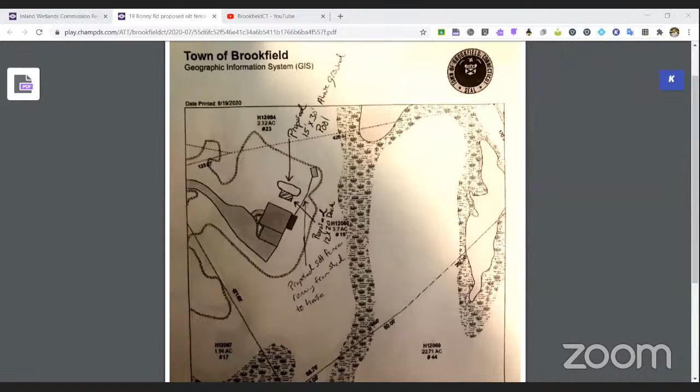Yeah, I'd like to look at that a little better. Again, that's part of the difficulty of these Zoom meetings, but we got to get it right. We have one chance to get it right. All right, I'll send that over for Monday. Okay. Or tomorrow. All right, good. Our next regular meeting is August the 10th, right? Yeah, August the 10th. Well, that's good. Now that I know it's staked, that also gives me a chance to get out there.

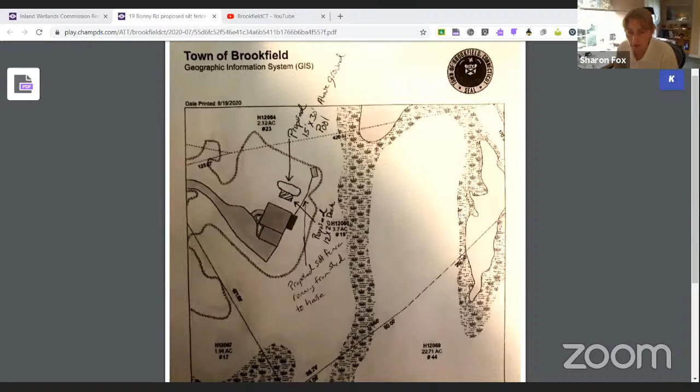All right, I can't think of anything else to ask Mr. Bologna. Does anyone else have anything for him? I do have one thing. Do we have the dimensions of the pool? It's a 15 by 30 oval and then with a 12 by 20 deck on it. Can you just add those to the plan as well? So we'll see the distance and just the general dimensions. All right, sounds good. And you confirmed, I think the last time, you don't have to take any trees down for this install. Is that right? Nope. Okay.

All right. Well, then I'll take a motion to continue 19 Bonnie Road. I'll make a motion. We continue number 5A, 19 Bonnie Road, number W20-29 to our next regular scheduled meeting. Okay, great. I'll second. Thank you, Dave. Any discussion? All those in favor? Aye. Aye. Any opposed? Any abstentions? All right, motion carries unanimous, 5-0.

Okay, next we have new business. I've got 854, 874 Federal Road, request for a permit extension. I think this is a project that we approved way back in 2015. Yep, I think we modified it in '17 probably. Sounds familiar. What I think about is, has anything changed in that area that might warrant some additional consideration? I mean, the only thing that's changed is the sidewalks are bigger on the Federal Road side.

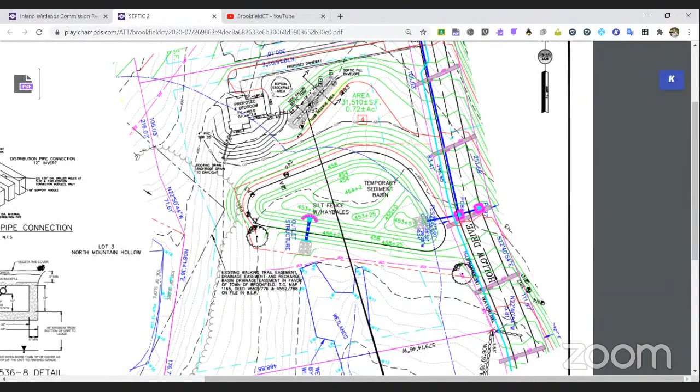So it's a new family residence, 2.45 acres, 0 disturbed wetlands area. Total wetlands is 100 by 60. No water courses, no disturbed upland review. Okay. So what do you want to tell us about this? The subdivision was given wetlands approval back in, it was either December of '15 or January of '16.

The detention basin that's on this property was part of the drainage for the road. There's a small wetland area to the south of the detention basin, and the house is located to the north of the detention basin. If you've ever seen it, it's a pretty large detention basin, and it's completely grown in now with all natural wetlands plantings. So there's really no disturbance to that or to the wetland caused by the house construction.

All right. Well, sorry, go ahead, Mark. I'd like to maybe take some exception to it's all grown in with wetlands plantings. I saw a lot of what looked like log length cut trees, some stumps, a bunch of stuff piled in that detention basin that looked like debris. Mark, it was never in it. I was out there today with Cynthia Rabinowitz from Northwest Conservation District and Jason Sivo, and we reviewed the basin.

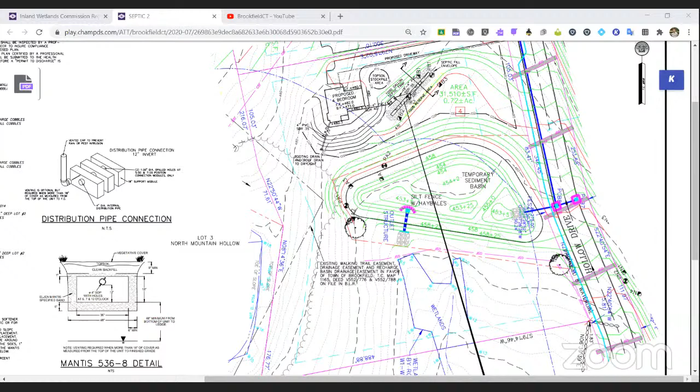All right, so we have a new home here. Is fill going to be necessary, Sivo, into this? I don't have the septic plan in front of me. The septic plan may have some fill. I'm just kind of interested because around the house, are those black lines there topo lines or new topo lines? From 480 down to... Well, that's a grading plan. So there is going to be some... Okay. Well, it's not fill, it's just a grading plan.

So what is it grading? It goes from 480 down to 470? Well, sure, the house would be at the higher elevation. Then the yard is graded down around it. And that's what you're trying to represent? You're grading it from 480 down to 470? Well, I mean, it's following the natural topography of the lot. So the engineer has to put that on there to show you.

But that's mostly because the septic system is... You're breaking up pretty bad. Yeah, unfortunately. Sorry, can you hear me now? Yep. Oh, the septic system's probably the only area that would have any imported fill. What's there now? Is it wooded or is it grass or what's there now?

In the area of the house? There's grass in between the detention basin and the road. And there's grass along the road. And then, where the house is going to be, it's just whatever weeds have grown up in there. But the tree line is back behind where the house would be. Okay. And then to the north of it, there's an existing house.

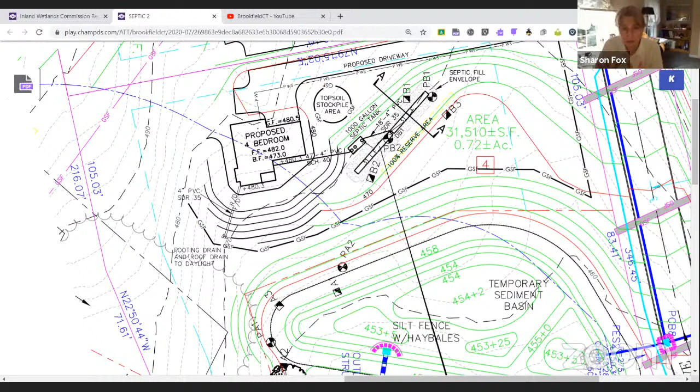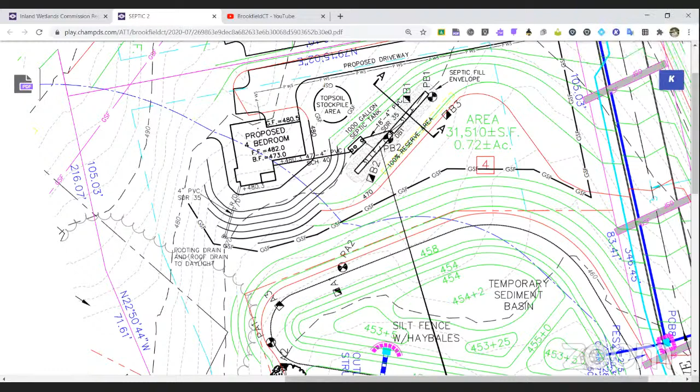Yeah, I think that looks, it's hard to, I'm trying to get myself kind of oriented. It's sort of like that, would it be the southwest side-ish? That sound about right? Yeah, down by where the corner of the septic system is by B2. Okay. Yeah. Yep, that will do.

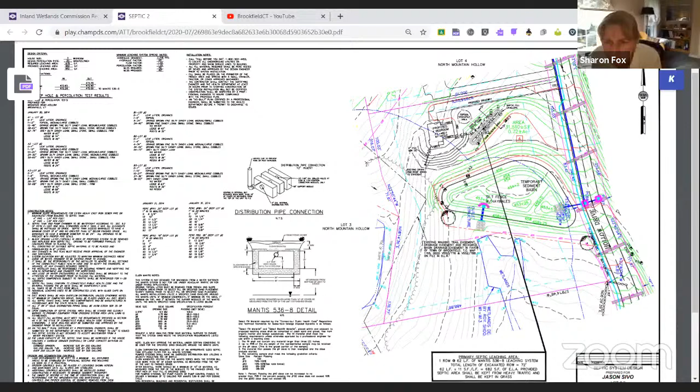Now, you've got one roof drain, or is there two? There's one roof drain for everything? No, there should be one in the front and one in the back. Okay, I'm looking at the one in the back. Yeah. And then what is that? Does that end in what? In some riprap, or what does that do?

Do you know? It's hard. It should be, the roof drains should end with a rain garden. Okay, I don't think this particular plan has a rain garden on it. At least I don't see anything that describes a rain garden. Can you maybe take a look at that for us? Yep, I can do that. I'm just making notes here what you want on the plan. Yeah. Yep.

Is that it? At this moment it is. I hope you appreciate all this stuff. It just takes a lot longer to sort through. I would also like from that roof drain outlet to the closest point of that detention basin dimensioned as well. Maybe far enough away. Okay. I just can't tell when I'm zooming in on these things. Yeah.

Can I ask a question? Oh, go ahead, because then I want to go back to something. Go ahead, Mark. Well, I think I'm confused. We approved this subdivision a few years ago. Had 12 or 13 houses, something like that. It was 12. Thank you. At least my memory's not that bad. But we had gone through with the experts and the stormwater and everything, and I thought we had maxed out what they were allowing on that site at that point. So is this an additional house to the 12?

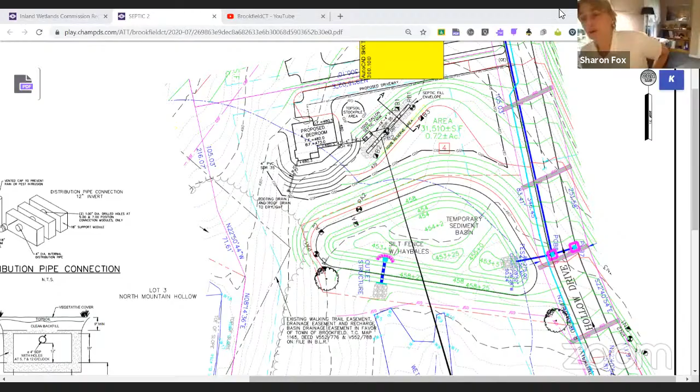Okay. You've heard a number of comments from Mark, from Michael, from myself, and I ask you to take them all into consideration. I'll get a chance to get out there and do that homework for the commission, and I'll take a motion to continue this to our next meeting. I'll make a motion we continue 4 Hollow Drive, number W20-31, to our next regular scheduled meeting. I'll second. Any discussion? All those in favor? Aye. Any opposed? Motion carries 5-0.

Okay. I think that takes care of all the old business and new business. So let's hop back to the public hearing for 100 Candlewood Lake Road, the new school project. Alice, do you know where Steve or Eric or Jim are? I don't see them. Am I missing them?

Can anyone hear me? Steve did not come because he has been going over everything with the engineers of the school, and they agreed upon a tactic to do everything that Steve has been asking them to do. So they're going to go back and add those changes to their plan, and there will be a new set submitted.

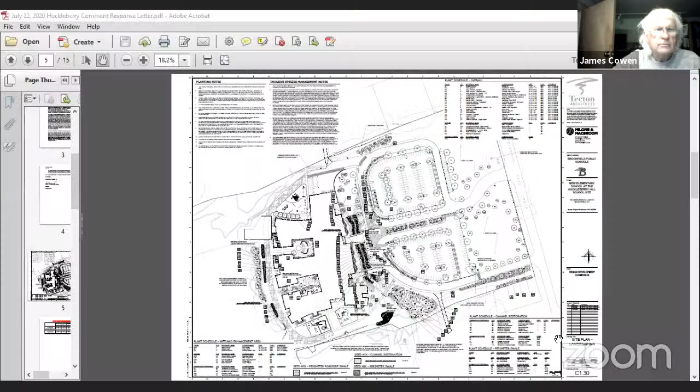Let's see. Oh, Alice, can you allow me to? Allison has to do that, actually. Yeah. Oh, okay. I'll do that right now. Okay. Oh, still saying it's... There you go. You should be co-host now. Yep. Let's see here. Share. Okay, so can everybody see the plan that's in front?

Yep. All right, so this is the revised landscaping plan. It's C1.30. On the landscaping plan, I'll zoom in a little bit here, in the upper left-hand corner of the notes, we've provided invasive species management notes. These are site-specific. The first note requires that a qualified biologist with knowledge of invasive species management be retained for the invasive species management implementation.

We've divided the notes into treatment of woody invasive plants, and those could be multiflora rose, they could be autumn olive, and so they have a site-specific invasive species management plan for those species. We then have a plan for woody vines, whether it be bittersweet and others, as well as herbaceous plants.

And herbaceous plants on this particular site, we've identified two that are of concern. One of them identified by Jim was the Canada thistle, and then one that also is on the site is purple loosestrife in places. And so we've developed a specific plan to manage those species. And again, everything is spelled out on the plan here.

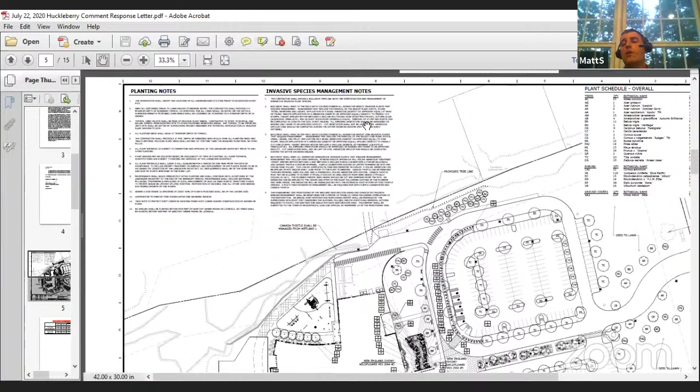We've also, as part of the plan, have a condition that the site will be monitored post-restoration for 3 years, and a report by a qualified individual biologist will be supplied to the commission detailing the success, the failure, or remedial activities that need to take place to make that mitigation and invasive species management plan successful.

So the other thing I think it's important to note is that Mr. Cowen also wanted to extend some of the invasive species management to the hairy fruited sedge location, which is right in this area here. I've made some special provisions or notes on that, is that we don't want any herbicides in that area being applied. So that is a herbicide-free zone.

There is some multiflora rose that is present in that area, and we have called for the actual hand or shovel removal of that multiflora rose in that area. Because again, we don't want to introduce a herbicide that could potentially harm or damage that existing colony of hairy fruited sedge. So that is the invasive species management plan that's been added to the plan.

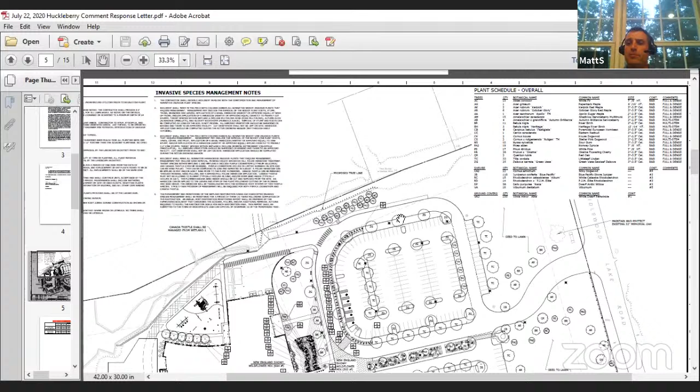Second topic that was raised by a couple of the commissioners was the water volume increase, specifically down at this location here, so towards the southern wetland number 6, this location here, as well as probably at the property line, were the two areas.

So what I did is I had our engineers take a look at what I call drain times in a given wetland, because it's important to understand, although we may be adding water volume to a wetland, what is that volume or impact to the vegetation or the wetland system based on how long that water is going to be there from pre-development to post-development. So those are the two numbers that we start to look at, and I call drain time.

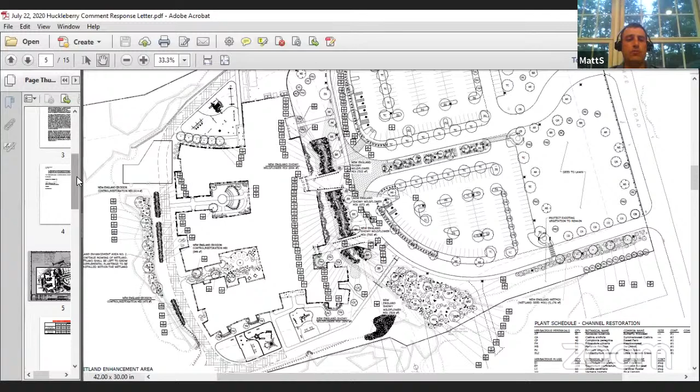Okay, and the way we look at that is we actually generate hydrographs that are part of the package that we submitted. Let me see if I can scroll down to those so you can see what a hydrograph looks like. So these are the hydrographs that are generated through our modeling, and they give us an idea based on the rating curve that you see there. The red curve gives us an idea of what the drain time is.

So with the peak rate of runoff, the peak volume is at a certain number of hours, and then how long does it take for that wetland to drain? Okay, and that's what you're seeing here in these graphics. And if you've reviewed the letter, you'll see that there's several different graphs that we provided.

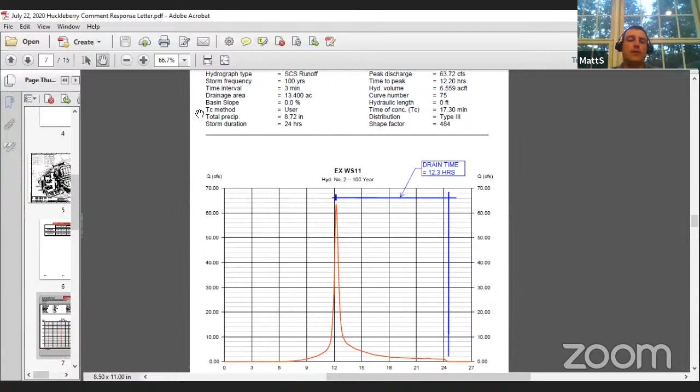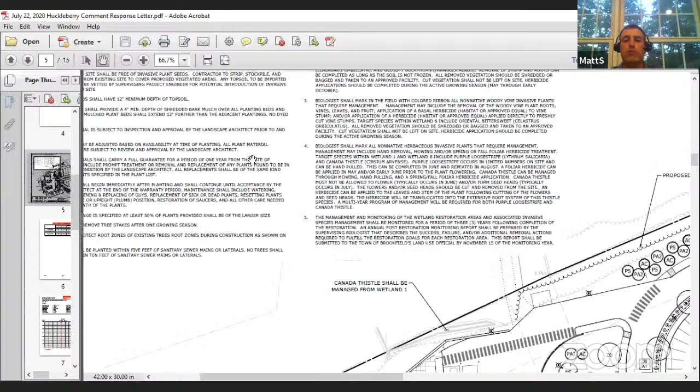Just so I understand, Matt, so that graph is specific for 6 or the property? So all right, so let me go back here and show you what these tables or graphs are showing. So we have an existing conditions. So we're looking at two things. We're obviously looking at pre-development, existing conditions, right, and then we're looking at post-development. So after the school would be in place.

And so we had two analysis points on our existing watershed analysis. Analysis point watershed 11 was right about at this location where the pipe comes out from underneath the parking lot, was our first watershed point under existing conditions. And our second one is actually at the southern property line in wetland 6. So both of them were in wetland 6. So there was 2 analysis points under existing conditions that we looked at. And that's all part of the stormwater report that the commission has.

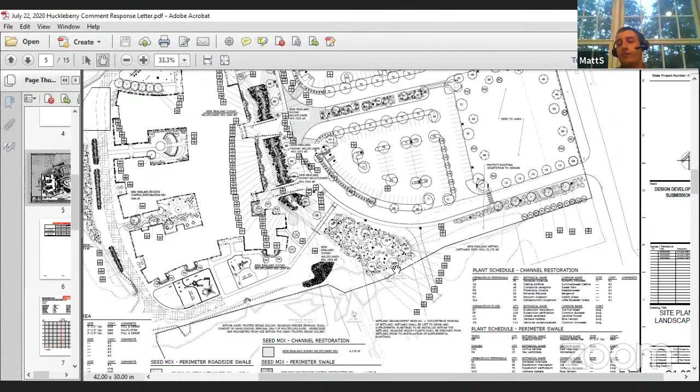So then what we want to look at under proposed is, okay, how does the watershed change? And we want to look at the similar location of where those analysis points were. So under our proposed stormwater reporting and modeling, we have 2 very similar points, one located right here, right at the existing watershed 11 analysis point, and we have a second one located at the existing watershed under the existing conditions right at the southern property line as well.

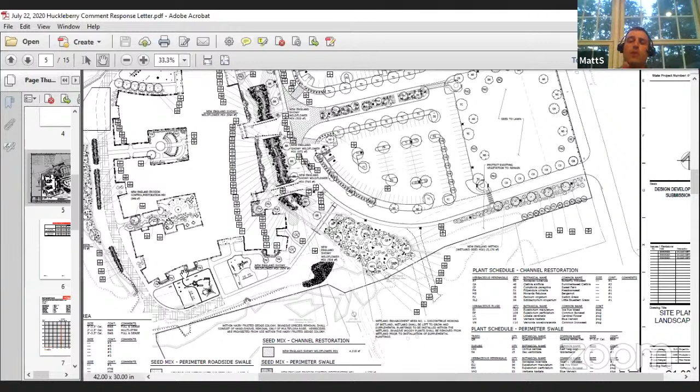So those are our 2 analysis points. When you have a chance to look at the tables, each one's labeled as to what they are in the graphs. Okay. So anyway, with all that being said, I think the most important thing is to take a look at the drain times. So I'm gonna take you over to the table now that shows the drain times, and we looked at the 2 through 100-year storms.

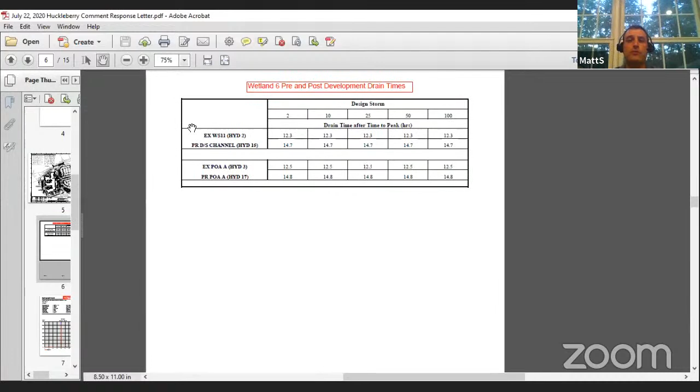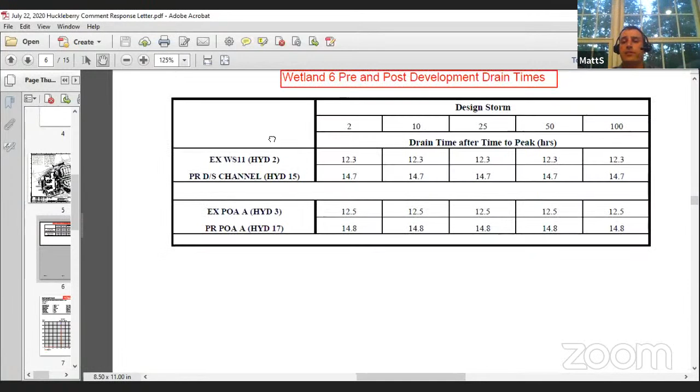So here's your existing watershed 11. This is right where the new school is kind of close to wetland 6. Under existing conditions, the existing wetland takes about 12.3 hours to drain. So the volume of water that gets there under existing conditions takes 12.3 hours to drain from that wetland and get back to normal conditions.

Under proposed conditions at that same location, with now the school in place, you're looking at an increase of about 2.4 hours, so 14.7 hours for that wetland to drain. So yes, we have an increase in volume of water at that point, but we only have an increase of about 2.4 hours of actual retention time in that wetland, and then it drains right back to existing conditions.

Hey, Matt, just help me with that chart again. So this row, EX WS11, that's the existing conditions at that point, right where that culvert comes out of underneath the parking lot under existing conditions. And that's right about where the new school is going to be closest to wetland 6. Okay, so the top 2 rows then are pre and the bottom 2 rows are post?

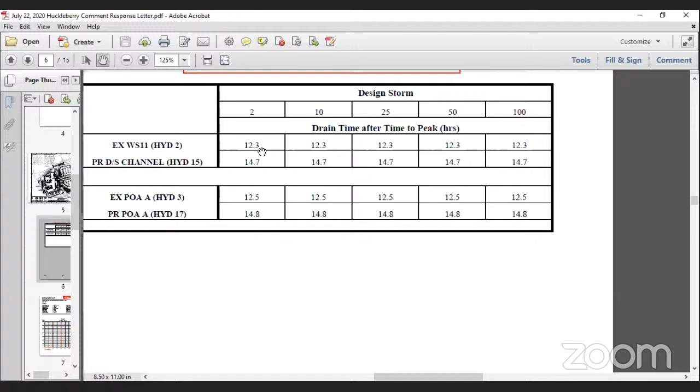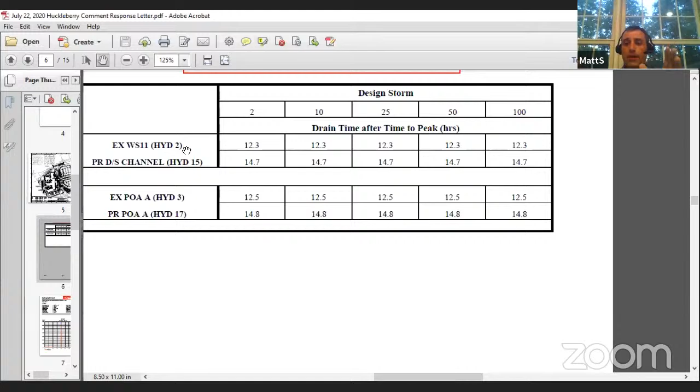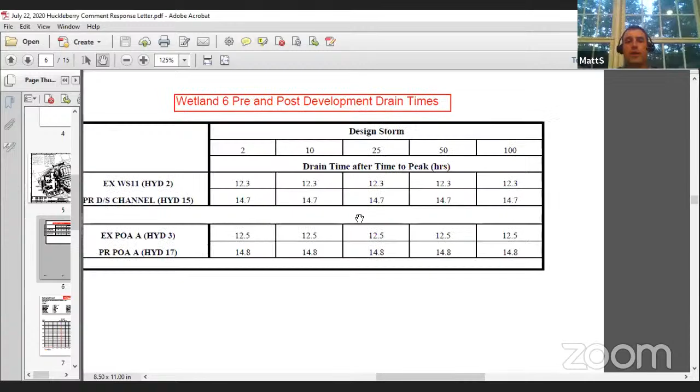No. So existing watershed is that point, the watershed 11, which is the point on the plan. Let me go right to the plan. I'll show you. So the first 2 rows. Can you stay on that drawing for me? The drawing or the table? Or go back to it, I guess. Finish your thing and then go back to that. Okay. So let me go to the drawing just so everybody's clear as to what the analysis points are.

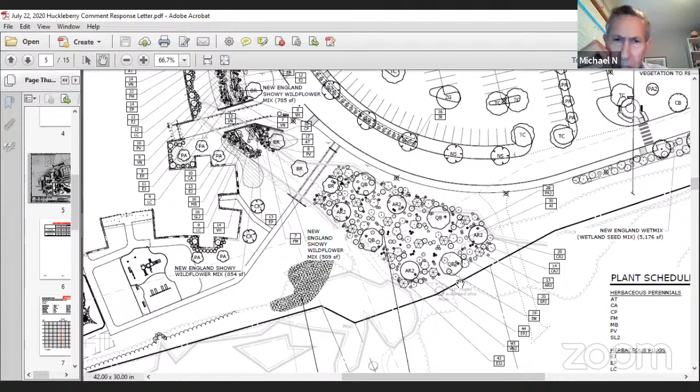Okay, so the first 2 rows are both existing and proposed conditions, and that analysis point is right here. The second row in that table, and we'll go back to that table in a minute, is for the analysis point here. And those next 2 rows have an existing conditions and a post development conditions. So those are the 2 areas. Is that clear? Yeah. Well, the 2 areas that we want data on are clear. I was just trying to understand which was which in your chart.

Okay. So I'll circle these 2 here, that analysis point right at wetland 6 where the pipe comes out and discharges into wetland 6. So this is existing, the first line, and this is proposed, the second line. That's why you see an increase from 12.3 to 14.7. So existing, proposed for that analysis point 1.

So is there a methodology type that you used for this calculation? Aren't there different methodologies that you can use to get these numbers? Well, the common methodology is through the TR20 model. That's industry standard. That's the modeling that's used to predict both peak rate of runoff, so your cubic feet per second at a particular spot, your volume of water, and then your drain time through the hydrographs that are generated in the computer modeling.

And in your opinion, for this type of property and that kind of topography, that's the appropriate model? Yeah, it's really the only model that we can use to predict these particular events in terms of drain times and how they would impact a wetland or water course. Go ahead, I'm sorry. I do have one question. Not an expert on this, but it seems to me that the drain time would be very dependent on the type of soil at that spot. Is that taken into consideration?

No, the drain time really isn't dependent, because again, you're thinking of a storm event, right? So it's been raining already for a period of time. This is a 2-year storm. A 2-year storm, you're looking at 3.2 inches in a 24-hour period. So the soils have probably already been saturated through the first 1 inch of rain, first 2 inches of rain. So you're in a condition where the soils are already saturated. So now you're looking at what the volume of water is going to be in this saturated condition for the 2 through 100.

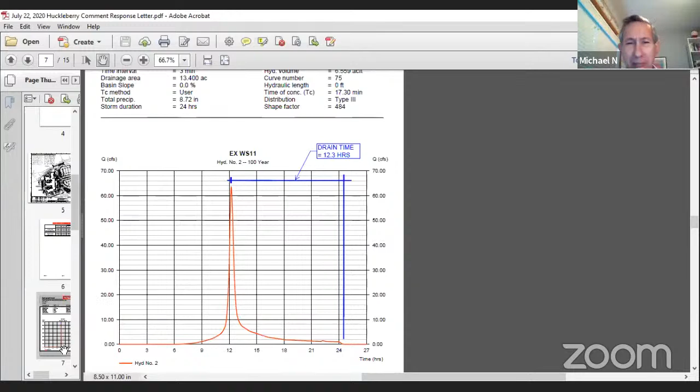I had that same question. I'm sure you did, Michael. Yeah, I'm sure everyone did. Thank you. I'm just going to ask it.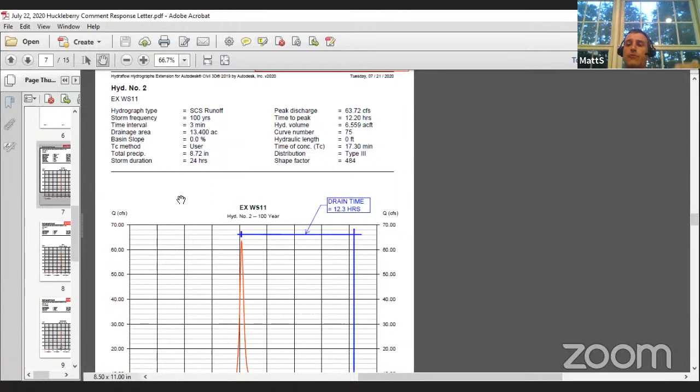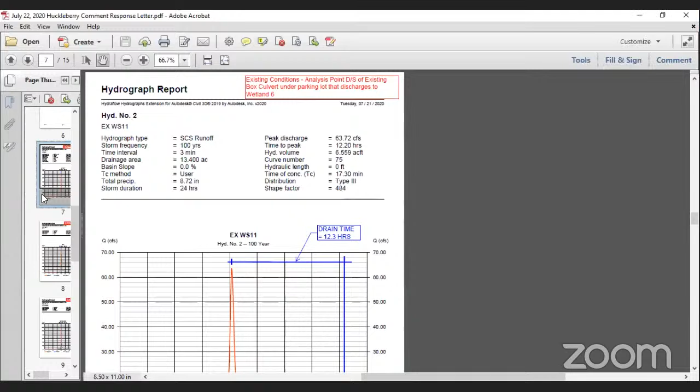2 inches of rain in a 2-year storm. How much rain do you get in a 100-year storm here? So let's take a look at the graphs, because I'm not sure if you're looking at them correctly. So if you look at the y-axis, we have our Q, our CFS. So if you go to each the 2-year, 10-year, 25, you're going to see that increase as you go to each one. You can see under existing conditions for existing watershed 11 2-year, you're at about 66 CFS. Okay. Under proposed conditions 2-year, you're at almost 78 CFS.

So that's 2-year. Then if we move to the 10-year, this looks like the 100-year. If we look at the 100-year, obviously we have 120 CFS. That would be after construction you're showing us now? No, this would be existing, and then proposed would be PR A, and we show 100 and 140. So we can see an increase in CFS. So the tables are showing the two. Go back to your first chart.

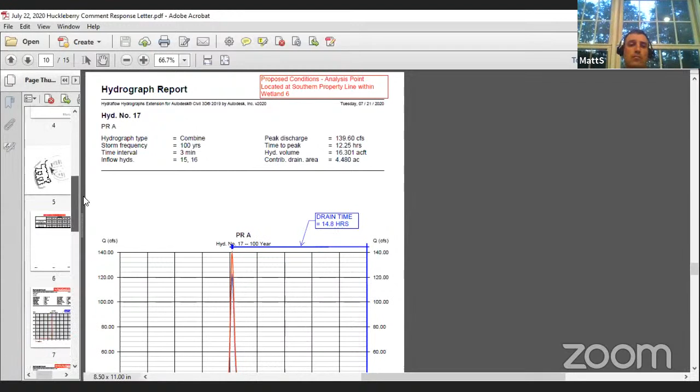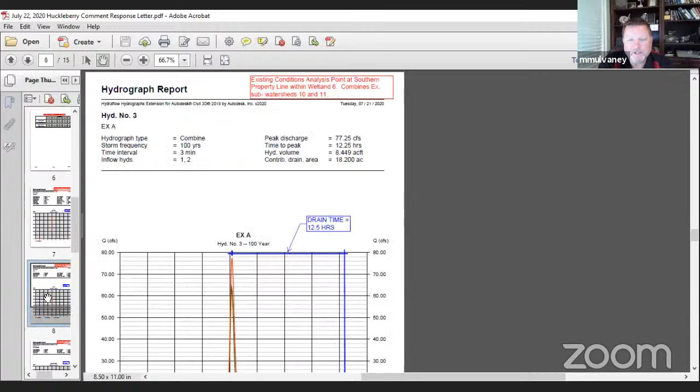Sure. That is telling me that in existing conditions, I have 12.3 hours, whether it's a 2-year, 10-year, 25, 50, or 100. And you just told me that 14.8 was on existing. And I said it's not, and you said it was. No, that's not existing. Again, what the tables and graphs are showing is presented in this table. It is 12.5 for the southernmost point in wetland 6, and it's 14.8 for proposed conditions, whether it's a 2-year, 10-year, 25, 50, or 100-year storm.

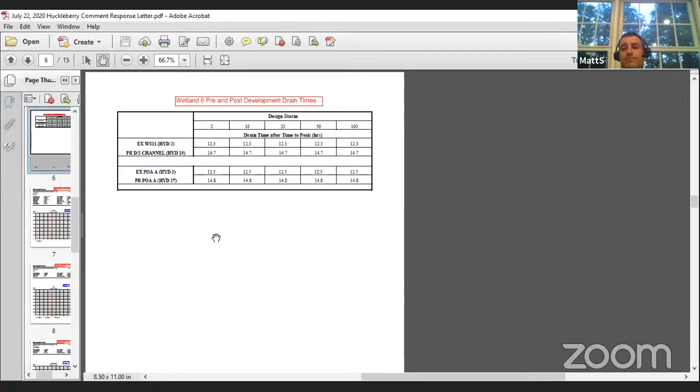How does that make sense? How many inches of rain do you get in a 100-year storm? 100-year storm is somewhere around 8.72 inches, I believe. And that takes just as long to get rid of as 3.2 inches. Yeah, because you've got to think about it. We don't have any restrictions, right? We don't have an outlet control structure or dam or an orifice. It just goes. There's a pipe today, existing. There's certainly a pipe. Well, but that pipe's not full?

Well, we're talking downstream of the pipe though. We're not talking upstream of the pipe. You're talking about getting rid of the water that's upstream of the pipe, or is that not what you're showing us? No, this is wetland 6. This is downstream of the pipe. So this is the southern wetland, wetland 6. This is what is coming out of the pipe under pre-conditions, and this is what's coming out of the daylighted section of channel under post conditions.

So we're not looking at upstream. We're looking at wetland 6, because one of the questions that was raised was what are the implications of the increase in volume to wetland 6? And so that's what we're looking at here. But this is certainly showing us an 18% increase in duration of post-development drain time. Correct. And what I'm telling you from a wetland scientist perspective is that it takes a considerable amount of inundation over a long period of time to change the characteristics of either the vegetation and or the wetland itself. That's fact. That's scientific fact.

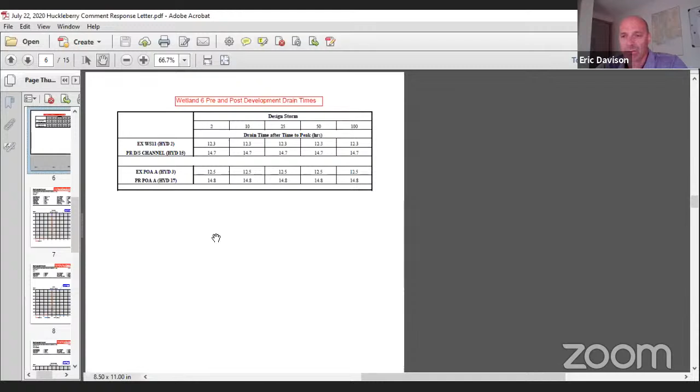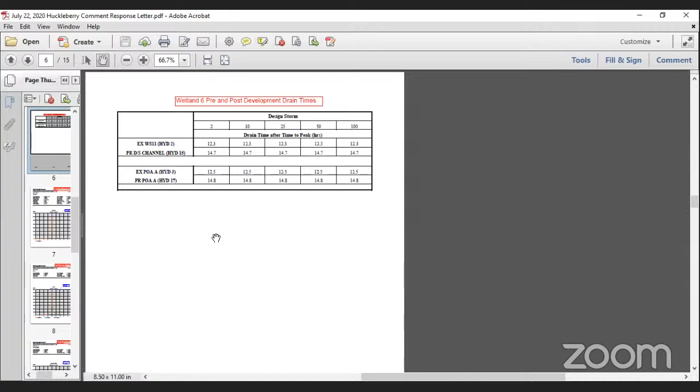So just so I can understand the map, I understand, Matt, this is representing those 2 points. What does HYD 2 mean and 15? I think that probably threw me first. If these were the same points, why aren't they numbered the same?

Well, so what happens is, when you start an existing conditions model, these HYDs are actually, and I believe you all have copies of the stormwater report as part of the record. If you were to go into the stormwater report, you would see these model charts that show you how the model is set up from the most upstream part of the watershed all the way to the downstream part of the watershed on a particular site. And so the engineers assign them values. So the upper reach might be HYD 11, the next one might be HYD 10, HYD 9, et cetera, as it goes down.

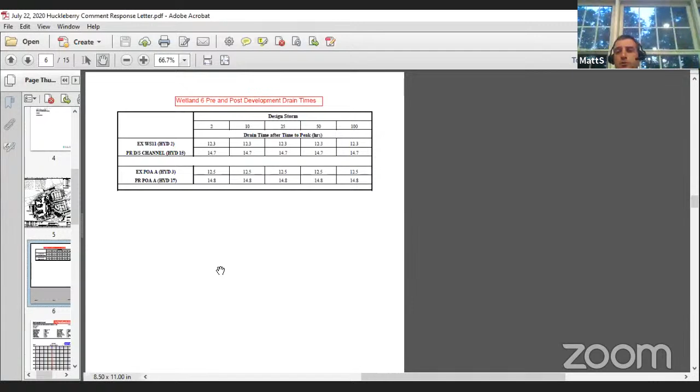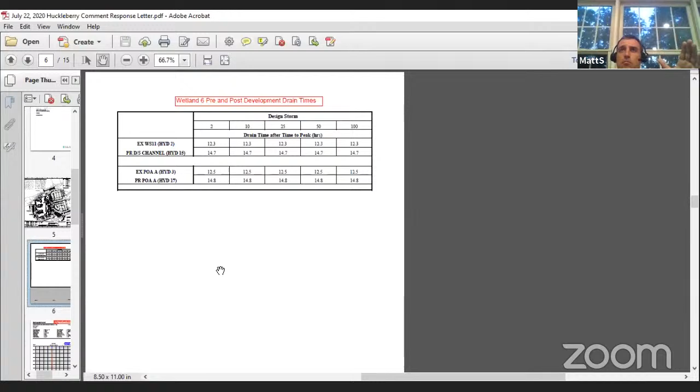So those really tie back to the report. If you look at the report and those numbers, you'll understand how everything ties together. So those are just coding systems for the modeling. And obviously it changes when you change the localized watersheds within a given site. Those numbers have to be reconfigured and renamed for proposed conditions so that the engineers can follow it as they move through.

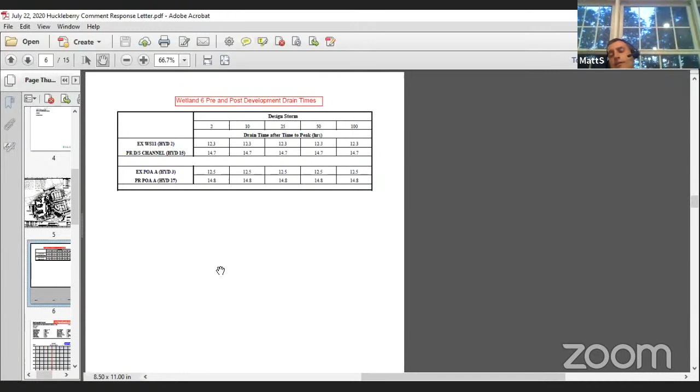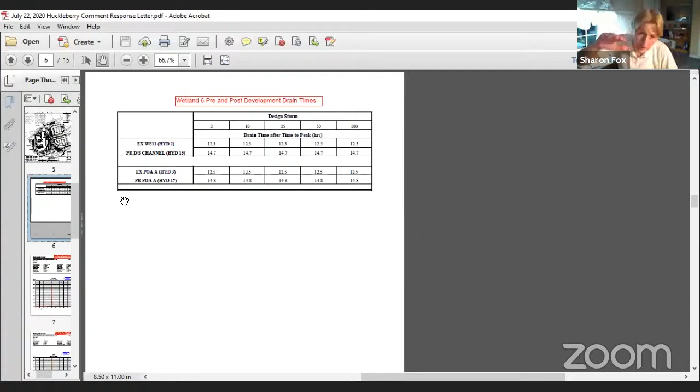Okay. So you showed me where these 2 points are on the map. What I was very interested in, I said that part of wetland 6, there's a small finger that runs right up next to what you guys are proposing for the building. Is that data not in this chart, is that right? Well, no. This data represents that wetland. So there is a finger of wetland 6 that comes right up against the building. Let me see if I can find a little note here.

So our analysis point is right here. This is where the building comes closest to the wetland. I think that's where you had raised concerns, this corner and its proximity. Oh, well, where the wetland actually comes up against the building is to the left, right where your cursor is. That's the part of the wetland I said is right up against that building. So your data right now is down here, right? Yep. So this is being filled. This part of the wetland is being filled under the proposed conditions. I didn't know that. Yeah.

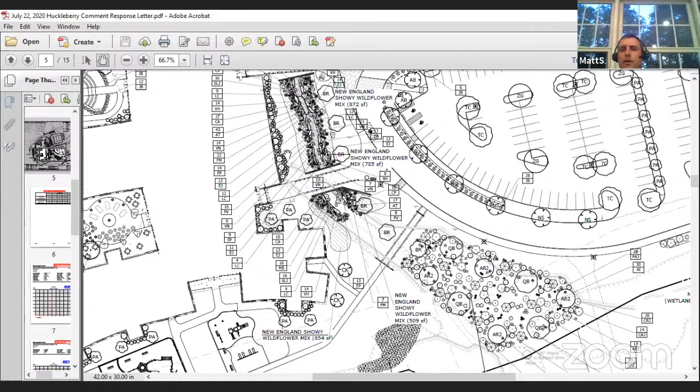So right now this is where the box culvert comes out from underneath the parking lot. If you've been out to the site and you walk from the back of the school parking lot to the baseball fields, this is that little driveway that comes across, and this is where the box culvert comes out. So under existing conditions, the stream is here. We're filling in this part of the stream and wetland, and we're moving the stream over and daylighting it over here.

So we took the question you raised last time to be this point here, where the building's actually closest to the existing wetland, not the daylighted new channel. But again, I think the most important thing is to understand what the volume is within wetland 6, and that's what we provided to you. That is what should be looked at in terms of the impact to a wetland or watercourse pre and post development as it relates to stormwater runoff.

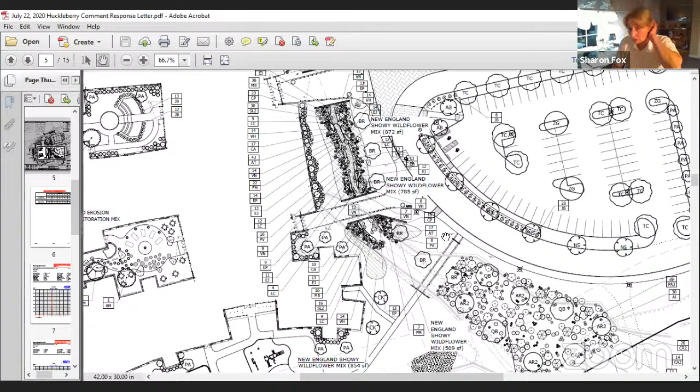Well, again, you've just brought some, I did not understand that from all of my reviews. I did not understand that part of wetland 6 that's on your map is to be filled. I understood that the only thing that was going to be filled was 4. I did not understand that. So thank you for that clarification. Yeah, I had heard it as uncovering the stream, not moving the stream, which is also a surprise to me. Yeah.

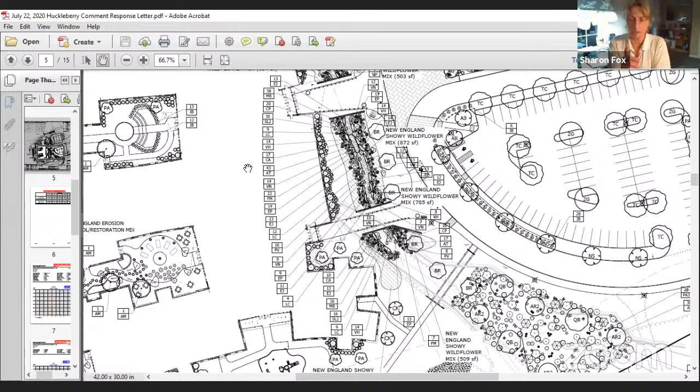Okay. What else do you have for us, Matt? I think that takes care of the 2 comments that I was going to address this evening. I'm going to turn it over to Ed. Before you go, like I said, this is a chance. Eric or Jim, anything that you've heard Matt say, in addition to our questions, let me just give you guys an opportunity to ask Matt about anything you've heard.

Did you know that, by the way? Did you appreciate that wetland 6 was going to be filled? Was that your understanding, and we just didn't get it? Yes, that was indicated in the original plans. All right. Yes, I understood that as well, that it was going to be relocated in a new channel, that was the purpose of the wetland creation, in part.

And I would just also go back to what Matt started with in terms of the invasive management plan. That's in line with what I was looking for. It gives sufficient detail and oversight by a professional to make sure that it's done correctly and that it's monitored, because these things can take time to get the invasives under control. So that satisfies my concern.

What about Matt? I think Matt had talked about a maintenance plan that goes on for 3 years for this particular area. I think of places like the High Line, where you've got rather comprehensive plantings. Maintaining this stuff is an ongoing, never ending sort of adventure, if you will. What thoughts do you have for whether it's 3 or 5, or should it be longer? There's a lot going on here.

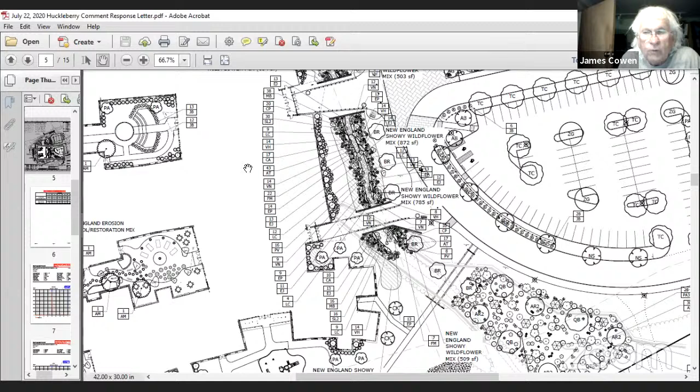And so that's primarily controlling invasives, but it will become shadier over time as shrubs grow in, unless you prune and contain. And so it may be from time to time that the school decides that they want to have a wetland scientist come take a look at it, or someone from the conservation district and get their input, someone like Cynthia. I know personally she's very interested in education. I don't know if that's in her purview now, but I would welcome

either from Jim or Eric and Matt, I would welcome any kind of insight that we can pass along to the town about the maintenance of this beyond, in your case, Matt, the proposed 3 years. So the town has some understanding of what they're going to have to invest to keep this at some level, whether that's hours per year or a range or something.

I would be interested in input from all three of you that we can pass along to the town to make sure this thing continues to do what it needs to do 20 years from now, 50 years from now. I'd be very interested in that.

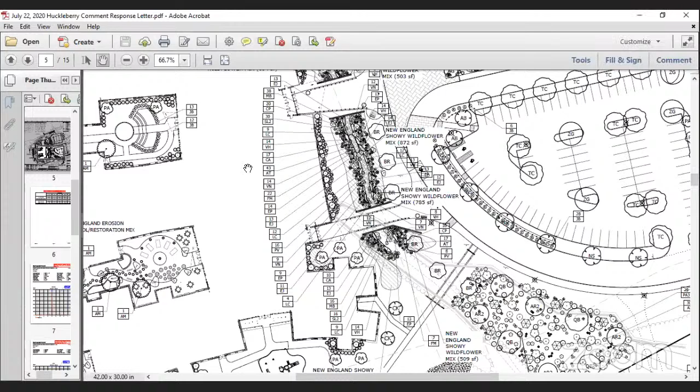Sharon, can I just add something? It's Eric Davison. Just an overall comment. I think the apprehension from the commission from the beginning has been the fact that you have this very large site, but there are skirting wetland impacts basically around the entire perimeter of the site, basically hitting all wetlands. But I think the real issue is Malone & MacBroom's been tasked with a certain design and constraints that don't allow them to use the eastern side of the site, which would be the obvious answer to avoid the wetland.

Our issue, Eric. What's that? That's not our issue. Their design is not our wetlands concern. Our wetlands concern is protecting the wetlands. Yeah, let me just finish my comment. What I'm getting at here is the whole issue of feasible and prudent alternative. I think if the applicant, whether you consider it's Malone or the town, the school board. It's the town.

So the applicant is presenting you with what their design constraints are. They've presented their alternatives, all of which had more impact, not less. They're basically telling you they don't have another, from their perspective, feasible and prudent alternative. I think that's just where you're stuck in terms of other mitigation options. There's really no other way to work any kind of magic on a site like this where you just don't have any space left. So I think that's really what it comes down to. What is the strength of the feasible and prudent alternative test in your eyes?

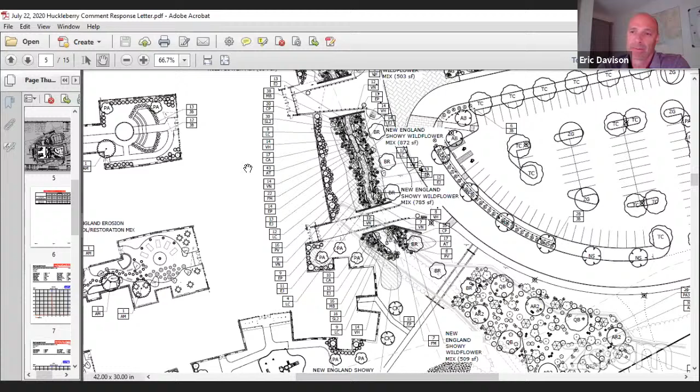Yeah, what I'm getting at is obviously it's a bit more nuanced than that, and the commission can consider issues other than wetland issues, such as safety, financial, et cetera. You can consider other issues. I'm not saying you have to. I'm just saying you can. You also can task the school board with coming up with a reduced size building if that's the answer, and see why they can't do that or what the issues that result from that are. But, well, thanks, Eric. Appreciate that.

All right. I said those were, I think, just questions, Matt, that were kind of relative to things that you had talked about. So we wanted to take advantage of that. So I think we're ready to move. You have some other things that you wanted to share with us?

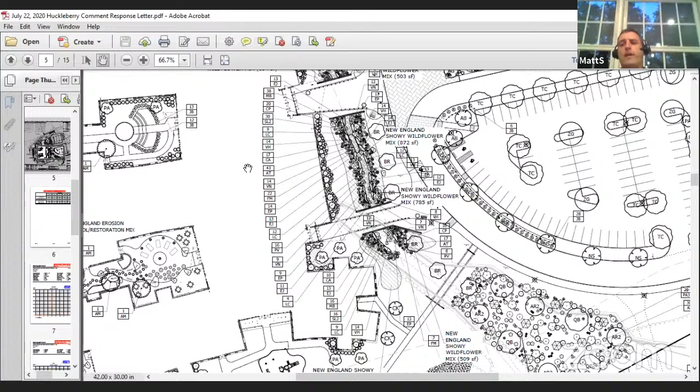Yeah, so what I'd like to do now is there's been some comments raised regarding the educational components. I would like Eddie and Jeff from Tecton to address our response to that comment, and that's comment number 3, and I'll turn it over to them now for their discussion. Okay, great. Thank you. Thanks, Matt. Hi, this is Eddie Widofski from Tecton Architects in Hartford, Connecticut.

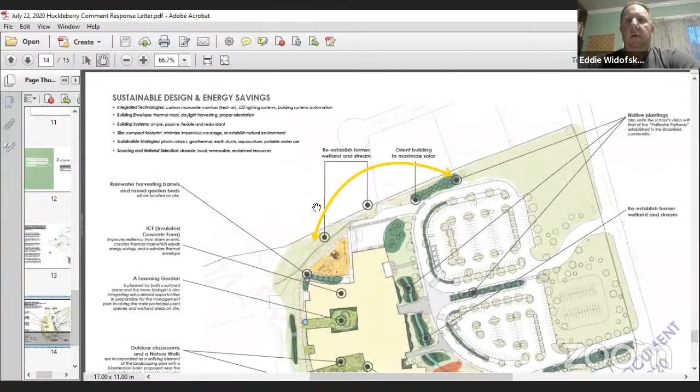Matt, actually, if you wouldn't mind going to slide 14. Slide 14, you got it. Let me see if I can make it a little smaller. There we go. So I'm going to try to be brief here. I know we gave a much more in-depth answer in the written documentation, so I'm happy to go into anything if you would like.

But just to let you know, the project all along has been envisioned as a marriage between building and site. We've talked very much since early on that strategies that we would employ with the building would extend out into the site and vice versa. The building is intended to be part of the nature and the landscape. So the concept of integrating its design into the educational program of the building has been there from the start. So when that was raised as a question or a comment, we were certainly ready to discuss and address that.

Obviously, there's a number of strategies that we've been discussing this evening and in the past weeks in terms of the wetlands, but there's also been elements of the site design, whether they're aesthetic or programmatic in terms of pathways and amenities, and also with the building itself. And what we'd really like to do is we envision the exterior being really a living classroom.

We showed a few examples of potential signage that could be incorporated for teachers to use as teaching moments, for outdoor areas to become those classrooms, to be able to use the signage there as touch points, but also for the average person in the public to be able to come and see the strategies. So I'm just going to quickly hit some of those elements.

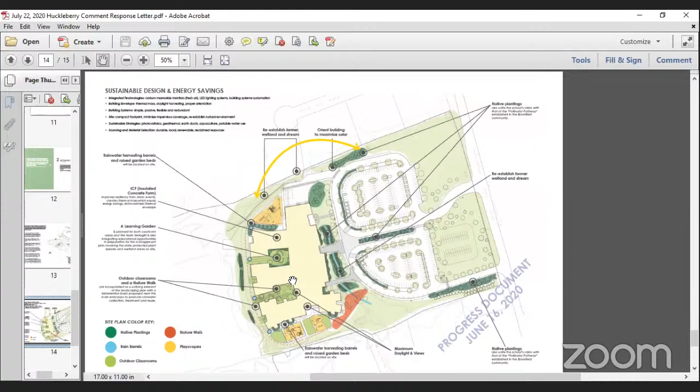Tree stumps of varying heights and diameters to encourage climbing and exploration. Benches that are composed of basically found driftwood and stones, raised planting beds. We have rainwater harvesting that's being done from some of our roofs, particularly the canopies and pedestrian bridges, coming down chains to rain barrels. So being able to use native vegetation and really talk about how growing can be encouraged, trying to look into some pieces with farm to table where some of the crops that are grown and spices and seasonings could be used in the kitchen.

I won't go into the various wetland strategies and the plantings we've already talked about, but of course there is the opening of the stream channel on the east side of the building and a dry stream channel motif that occurs in the green area connecting the building out to the main play area.

Really trying to, again, I keep saying the native plantings, but Brookfield has been tasked with trying to be part of the pollinator pathway, and we certainly see the vegetation being used in a way to encourage pollination with bees, with butterflies, and really to make it a habitat that everyone can enjoy.

Oh, I'm sorry, let me tell you a little bit about, as I mentioned, some of the strategies with the building itself as well. There are strategies that we've employed, from the use of insulated concrete form walls for all of the exterior of the building. It's a thermal mass, a very high R value. We've gone with a very high R value for the roof, for future photovoltaics, the fenestration of the building, the orientation.

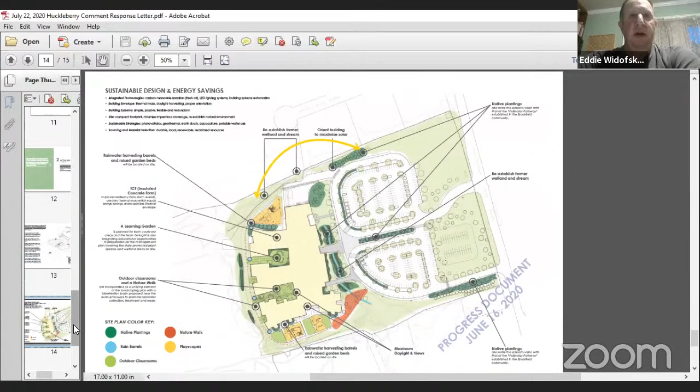These are all pieces that are part of the ongoing passive solar and thermal design of the building that can all be used as teaching points to show the students how to actually integrate the building with the environment, and with dashboards electronically placed in the lobby of the space to really see what the actual effects of the design of the building are. So I don't know if I was brief or not, but if you have questions, I'm happy to answer.

Thanks. Appreciate the reminder. So I think that's what we had in terms of the response to comments. Again, we're happy to answer additional comments that the commission and/or the public may have. Okay, great. Thanks, Matt. Again, I appreciate, the applicant here is the Town of Brookfield. Well, I got that. You guys are their agents, and I got the difference, a big difference.